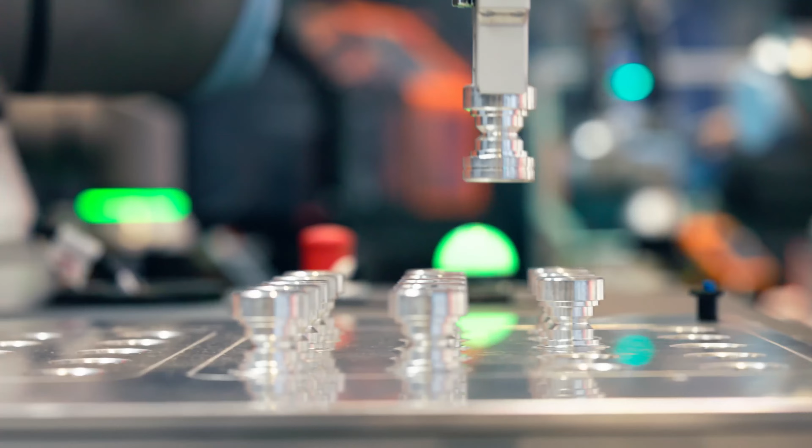CloudNC is a manufacturing technology company. We want to make it easier for the world to manufacture everything. At the moment, we make it easier for the world to manufacture this. This is a component. It was made in a CNC machine. CNC machines are those big kind of boxes that you see in factories where you make metal components that comprise everything in the world, from planes to cars to oil and gas infrastructure to even molding stuff, so like where you get your food from.

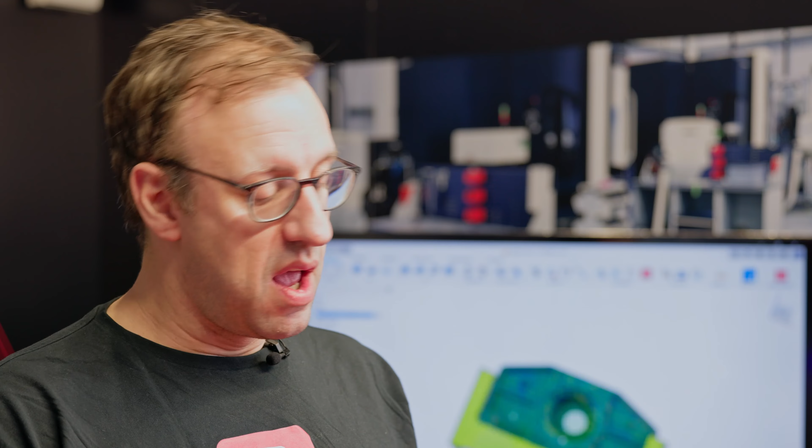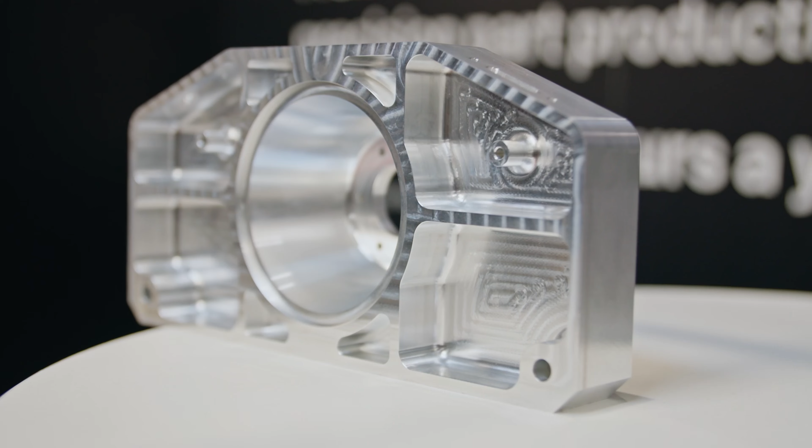This isn't easy to make. This requires skilled labor. It requires someone programming a CNC machine. To make this component might take about 6 hours to program. There's not enough people to program CNC machines anymore. It's a difficult skill and people are aging out of the industry. What we do is we develop an AI that makes it much easier for people to actually create these kind of components. CloudNC's main product is CAM Assist.

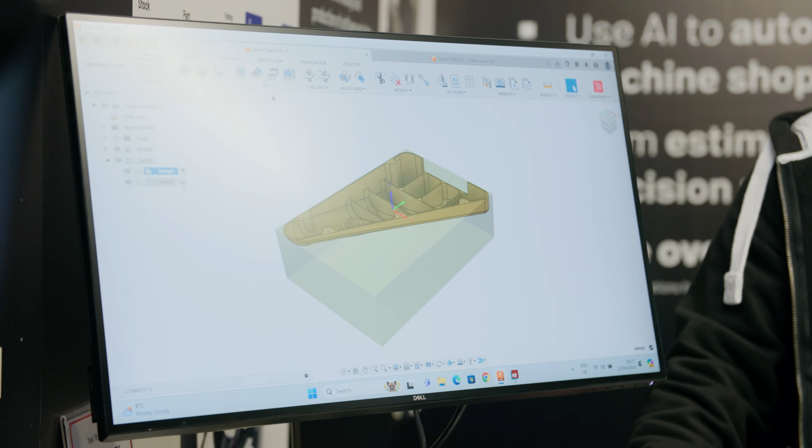What CAM Assist does is it's a plugin for CAM software that basically automates how easy it is to make a toolpath for this kind of component. So you're accelerating the creation of this from a period of like hours to even days for really complex stuff, down to a single click of the button, and how to make this component will be in your CAM software in a couple of minutes. That's kind of insane. Nothing else like this exists on the market.

It's the culmination of 8-9 years of really, really difficult algorithm crunching, top technical stuff. And we've basically been able to put into a computer the understanding of how the machining environment works. Machining is really difficult. It's hot, gets loud, gets sticky, and it's really expensive if you make a mistake. So this technology has to be on point. We're really proud of what we've created.

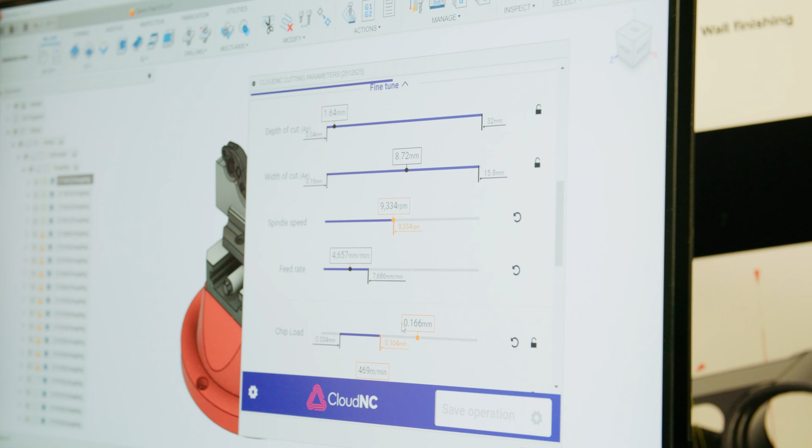We launched it last June for 3-axis components. It's now able to do 3+2 axis, so that includes an element of rotation, which increases the complexity of what we can do even more. And this week at MACH, we've actually announced a new module for CAM Assist, which means that it also automatically now sets feeds and speeds for the CNC machining process as well. Nothing else like that exists either. This is all within your existing CAM program, and it substantially increases what a single person is able to do in a machining environment. It's a step change in productivity.

Why does this technology matter? If you're a machinist, it matters because it can save you money and make you more productive. It can make your machine shop way, way more efficient because you don't have to waste time programming components or resetting or doing lots of boring, busy work. You can set the AI to do that, and you can get busy with what you do best, which is actually the difficult stuff of machining.

What that matters for the world, though, is even more important because if you extrapolate that across the sector, what that means is maybe we don't have to export everything to China or India. Maybe we can bring reshoring back. Maybe we can make machining more efficient, more productive. Maybe we can grow a domestic manufacturing sector in the UK or the US. That's really important, and that's why CloudNC exists.

We've had an amazing couple of days at MACH. We've met existing customers who have come over and told us how much they're enjoying using CAM Assist and our technology. We've met new customers who say they can't wait to get started using it. And we've met other potential partners that really want to integrate our technology with what they're doing. This is a great conference. It really does bring the heart of the UK manufacturing machining sector to your booth, essentially. So we've had so many great conversations, and we can't wait to come back.